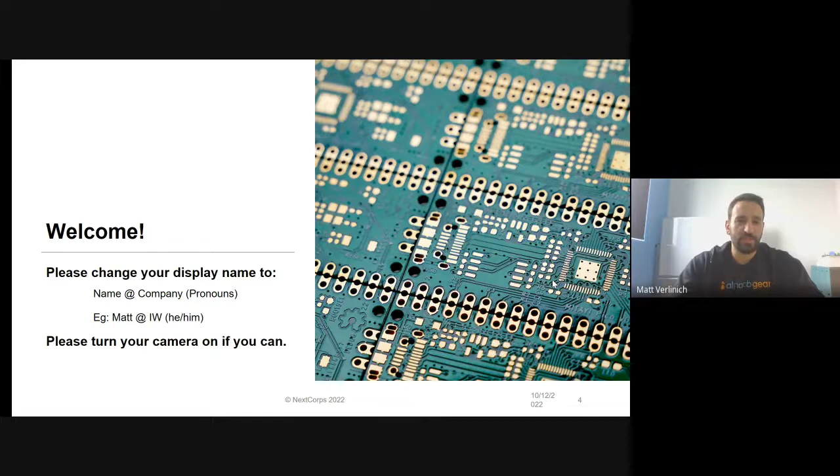Feel free to put your cameras on if you are comfortable with that. I feel like it helps engagement with other participants, but if not, no worries. I'm not sure if you can change your names in Google without changing your full settings, but give it a shot.

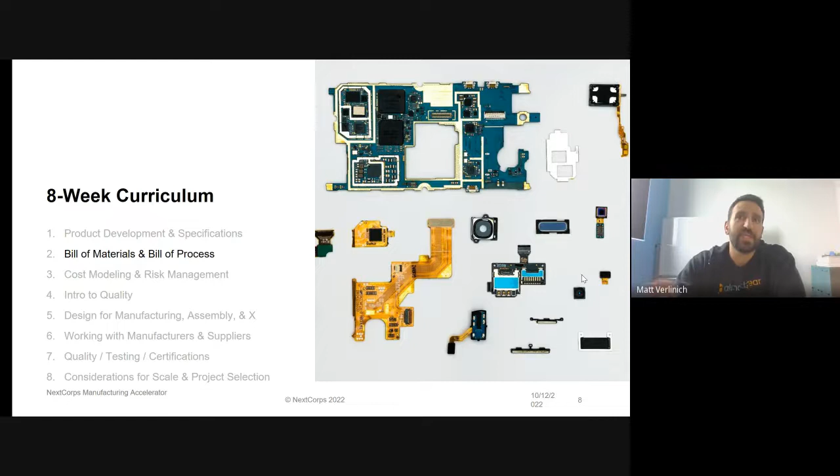Today, we're going to talk about bill of materials, bill of process. Last week, we talked about product development and specifications, and the recording of that is updated in the folder. Let me know if you don't have the link. Next week, we'll talk about cost and risk management, which is a really important topic, but also very essential to have a decent understanding of your bill of materials and bill of process in order to have a full grasp of some of those concepts.

So today we'll introduce you to the bill of materials and talk about different types of parts that are on it, as well as essential and nice to haves, and how it connects into other documents. We'll also talk about the bill of process, which in general covers, I like to think about three different types of bills of process: process flow diagram, an SOP style bill of instruction, manual bill of process, and then what I would call a costed bill of process, which is like a tabular form of how much labor is embodied in your product.

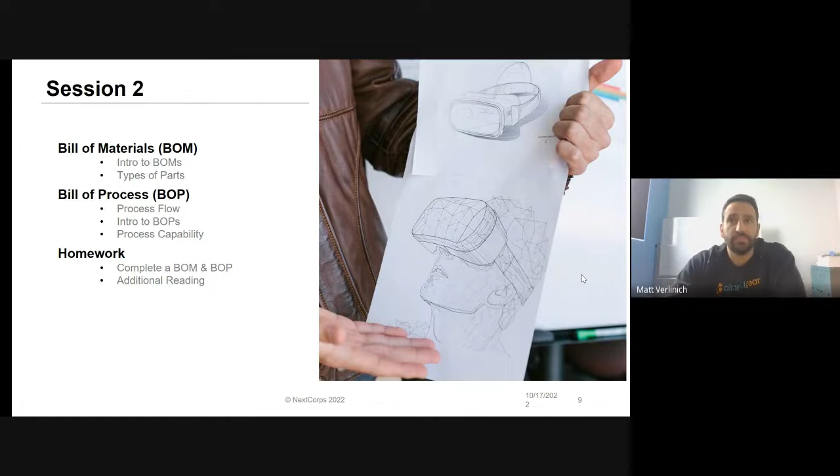Recap from last week. PRD stands for your product requirements document. Every customer requirement that you end up documenting from your customer discovery should be translated into a technical specification for your product, and therefore then documented in your PRD. These specifications can cover, but are not limited to, functionality, durability, reliability, aesthetics, certifications, and more.

The specifications portion of this should be quantitative. They should have a target value and then an assigned maximum or minimum, or both, for acceptable values. These specifications should be validated and verified through a quality test, which ideally would be its own document, which we'll talk about later, the quality test plan, and you can link specific sections of that into your PRD so that it's all tied together.

So just for the sake of the data nerd in me, if you made a stab at filling out the PRD, just drop a note in the chat. I'd love to see how many people actually took a stab at it, or maybe updated one that you already have. But I want to try to get through this so that we can actually have a good discussion at the end with some questions.

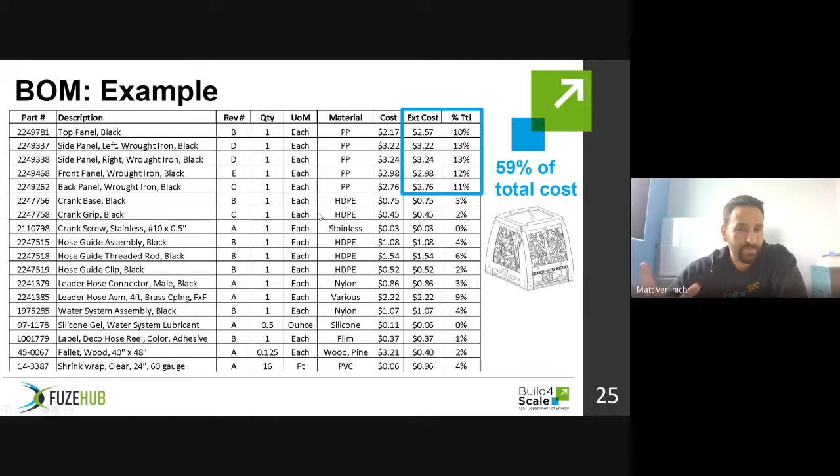So to that effect, I would highly recommend using an indented BOM format, which basically allows you to really quickly and easily identify and categorize your major systems, and then your subsystems, and then your second level subsystems of your overall product. And I'll walk through that as an example here. I don't like this as an example, but it can be useful for just seeing how somebody would fill out this particular style of BOM.

Here is a better example of the indented BOM in particular. So at a top level, we're looking at an alternator here. At the next level down, we're looking at the stator, 1.1. Now, if we're looking at 1.1.1, the stator is made up of the frame and then the windings. So the frame would be this orange part, and then the windings would be that purple part, as you can think of it.

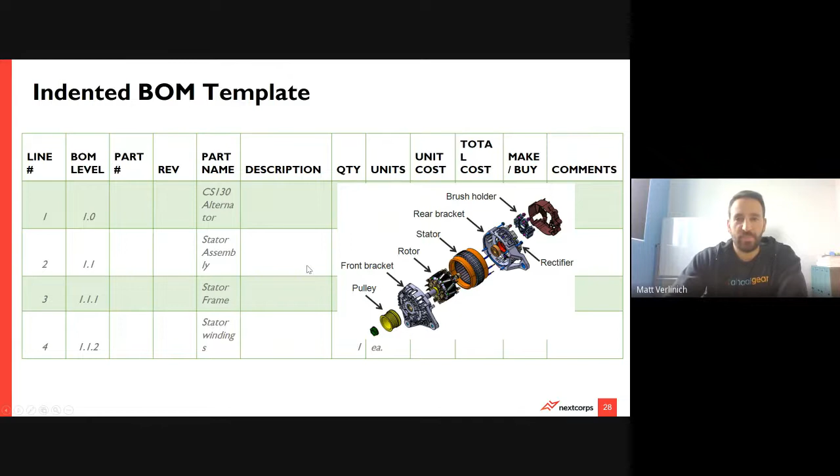So that way, if you filter based on anything that has a 1 in it, or 1 is the alternator and it's all of its components. Anything with a 1.1 is relative to the stator. But I'll walk through an example of that dynamically, which I think is a little bit more easy to understand.

There's also a useful distinction between two different types of BOMs. One is an E-BOM, an engineering bill of materials, and an M-BOM, a manufacturing bill of materials. So most people have only ever given thought to an engineering bill of materials because you're probably prototyping something that you ultimately hope somebody else will make for you, another contract manufacturer.

And the difference here between the two is that an E-BOM doesn't include a number of other potential consumables that should be embodied in the cost of your particular unit. And that could be things like plastic protectors used in transport from one assembly line to another, or from your manufacturing facility to a packaging facility, packaging materials, different types of boxes, all sorts of random things like that.

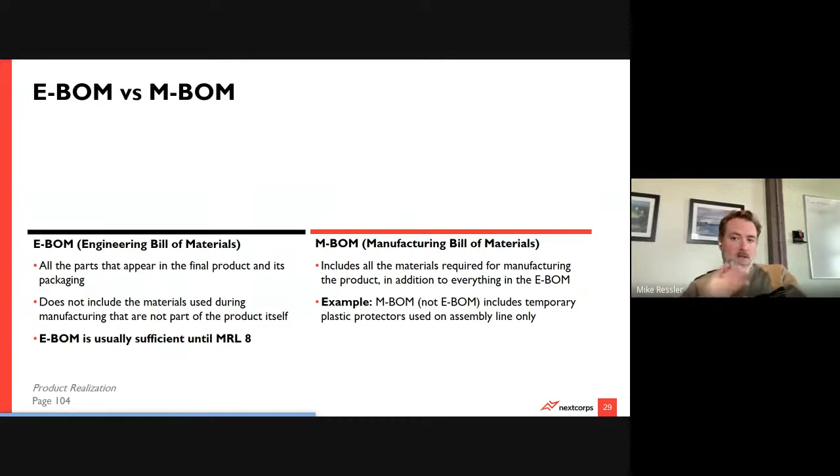What's up, Mike? So you said it would include the cost of the things we would need to ship between assembly lines, which I get. Would you model shipping into something like this itself? So like, per unit, it would be about this much, the actual shipping cost, or would you hold on to that separately somewhere else? That is a really good question.

And I would say that depends on what you intend to use your bill of materials for and what stage your company's development is at. If you're looking to get a really good idea of what your actual unit economics are, then I would include it, especially if you are responsible for it.

For instance, if you are having cases injection molded at one place, but your electronics PCB manufacturer is assembling them, then you would probably want to figure out and document how the cases get from here to there and how much that costs, especially when you have different potential configurations coming from different suppliers. And if you're using, we're going to talk about this in a minute, a flat BOM structure, this is where it gets really complicated because it's only two-dimensional. So you can't do multiple different analyses very effectively.

So all of the potential permutations of cost that come from using this supplier over that supplier, and shipping from here versus shipping from China. I would create separate individual BOMs for each one of those cases and manage that in a specific folder for that task of doing the analysis.

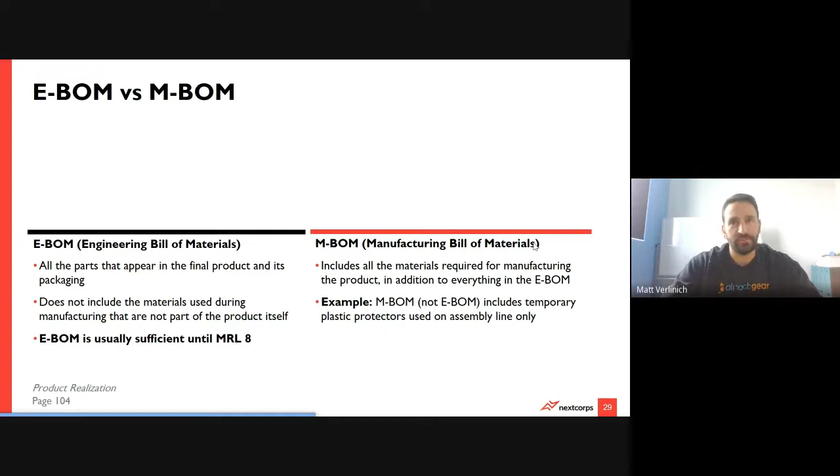And if you make a design assumption early on, and then you find out later that it's a real burden to actually manufacture that and set up a manufacturing line, it could have been helpful to start the MBOM earlier, or look at it that way. So here's an example template of the indented BOM. Again, we'll go through an example, which will be better.

Now, another really critical task, which I think is oftentimes overlooked, same thing with the PRD, the product requirements document, we mentioned this: change management and version control. The earlier you are, the more stuff is changing and more rapidly. And so I wouldn't necessarily recommend instituting a really rigorous change control process, because you want to make those iterations quickly and not hold yourself up.

But as you start to get higher in the MRL level, as you get closer to actual production delivery, you really want to be disciplined about documenting every single change that is made to your bill of materials on a cover sheet so that you can quickly and easily assess the difference between one and another.

Especially if you're using Excel sheets and like a flat BOM structure, it's really easy to bury assumptions in the calculations in an individual cell that maybe are no longer valid. This is a great example: if you're cutting parts out of a sheet and you switch from one sheet size to another, your cost could easily drop by half. But if you forget that that assumption was made and you change it, suddenly you'll wonder why your cost dropped so much, and is it an error, or did you break a formula?

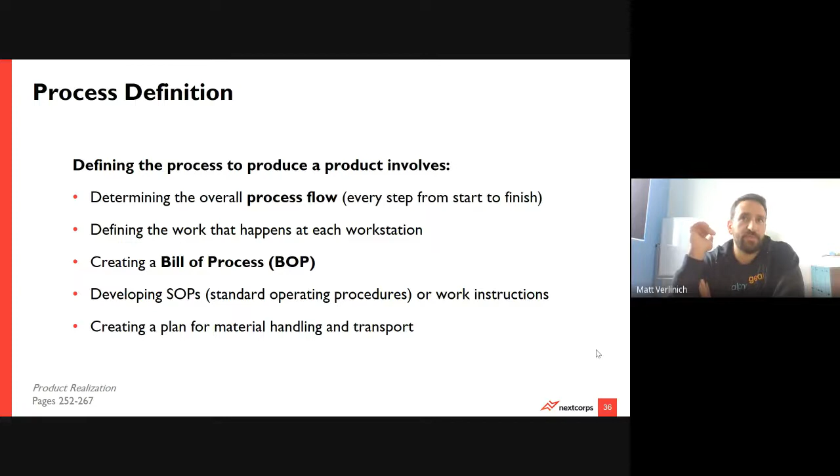Now, that may or may not be a valid assumption, depending on what your product is, how complex it is, whether it has electrical, mechanical parts, what your specifications are. It's very complicated. And so I wouldn't recommend digging in and trying to complete a full bill of process, because it's something that takes a considerable amount of work and will change dramatically depending on your design decisions as you continue to iterate. So that's why I would say it's a good idea to start with a process flow diagram, which is a sort of overview, simplistic view of it, and then work your way into creating a more sophisticated full bill of process, as well as SOPs.

So here's an example of a pretty generic, easy to understand process flow diagram for making banana bread. So we would start up here by assembling these ingredients. You move them to an assembly station. There are some sub steps ahead first, which is, mash the butter and the bananas together. That combination goes to the assembly station to start with. Same thing with the eggs. You got to beat them, make the batter, move it to a pan, bake it, and then you end up with banana bread.

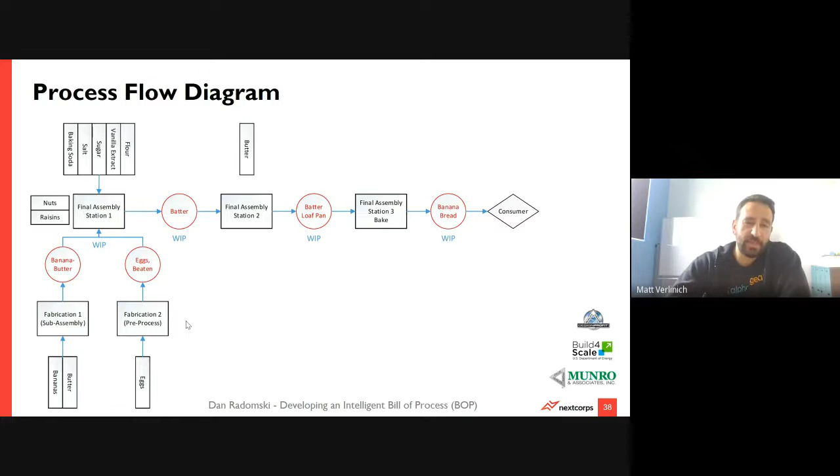So that level of process flow diagram allows you to identify things that can be done in parallel, what work in progress stages there are and how long that takes. So is there anything that can be done to streamline this process? Where do you want to put quality control checks in? Things like that. Useful for your general design decisions.

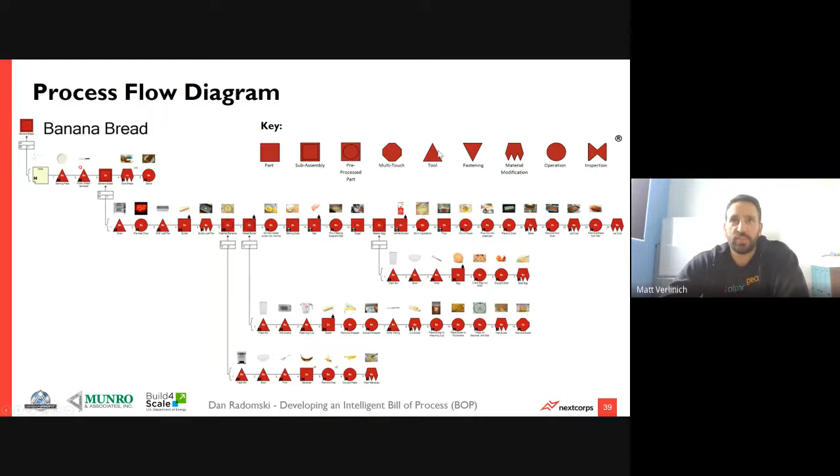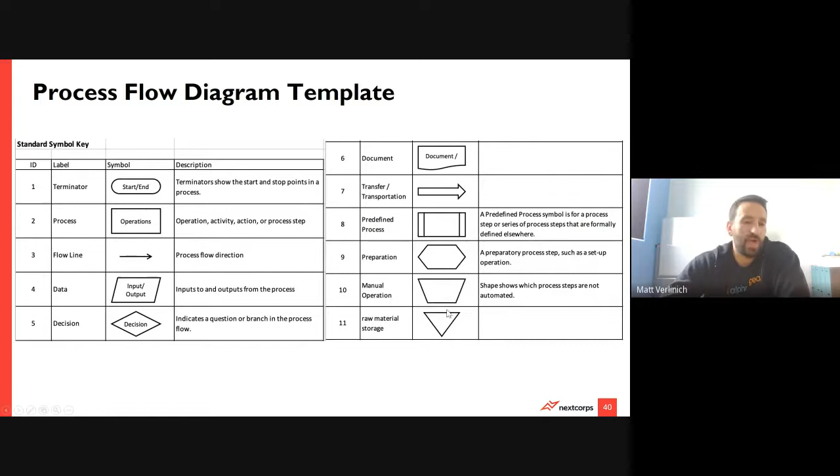Here's a bit of a more complicated bill of process, also for making banana bread. That came from the Build4Scale curriculum. So you can see here, there are different icons that mean different things. Tooling, a part, sub-assembly, pre-processed part, and multi-touch inspection steps, things like that, which in creating your own process flow diagram, I would choose something that makes sense for you. But we also have provided in the process flow diagram template some basic operations and diagrams that you might want to consider using.

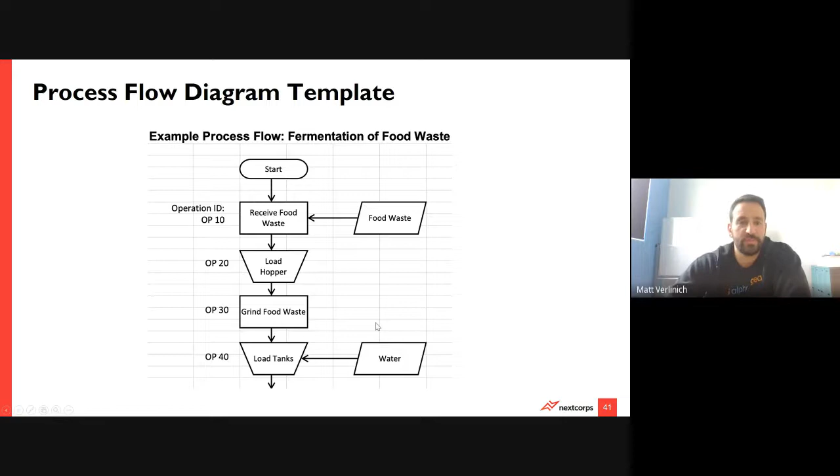Another example of that, the one document has it in an Excel sheet. I also created a Google Drawing template, which I think is a little bit easier to use because you can more dynamically rearrange stuff and it's less resource intensive on your computer. But we'll go over that in the example.

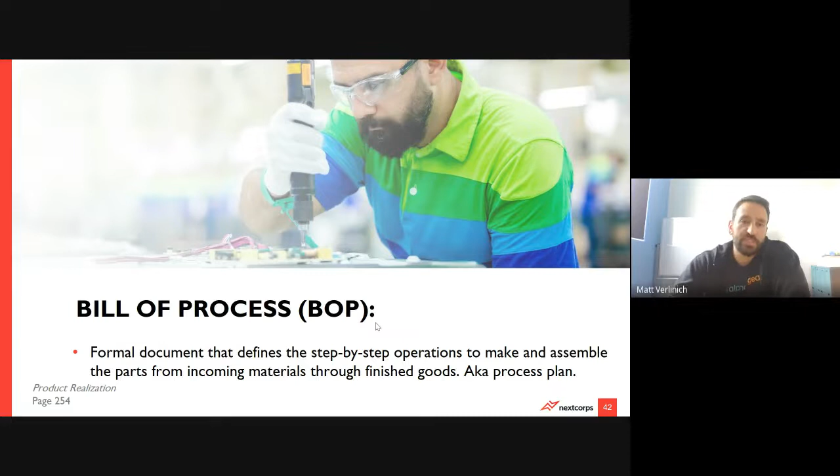So the official definition of a bill of process is that it's a formal document that defines the step-by-step operations to make and assemble the parts, everywhere from incoming materials all the way through finished goods. So also known as your overall process plan.

So this is a document that you would put into place so that you could have that available for hiring new employees or swapping out employees as there's changeover, or in the case of using a contract manufacturer, it's something that they would either want you to already have, or more oftentimes they want to develop it for their own systems, given their understanding of how many different employees they have with different skill sets and how many different assembly lines they have that can operate in parallel. But it's a good idea to have a good place to start.

This is a more tabular view of it, which I would call a costed BOP or a costed bill of process. And even this isn't a great example of it because it doesn't have all of the times on here. But the objective of this is the same way that you would use your bill of materials to identify and optimize your part costs and your manufacturing methods, so your design for manufacture, you would use a bill of process like this to optimize for assembly. So design for assembly, or some aspects of design for manufacturability as well, which we'll talk about in, I think, the 5th session of this curriculum in greater detail.

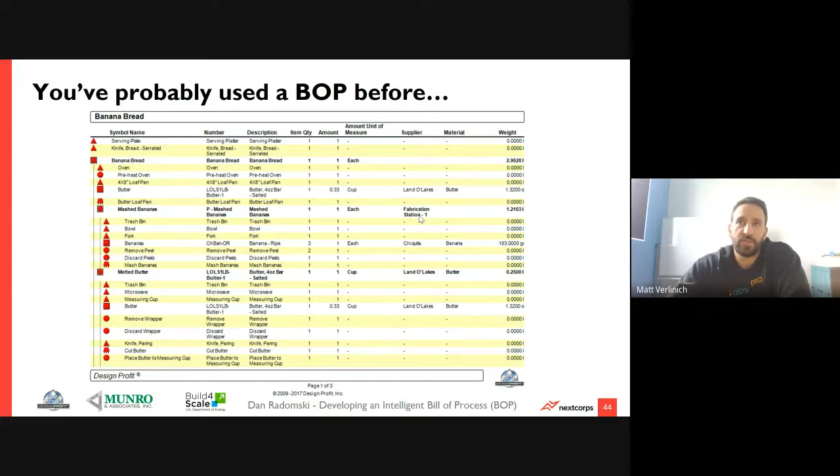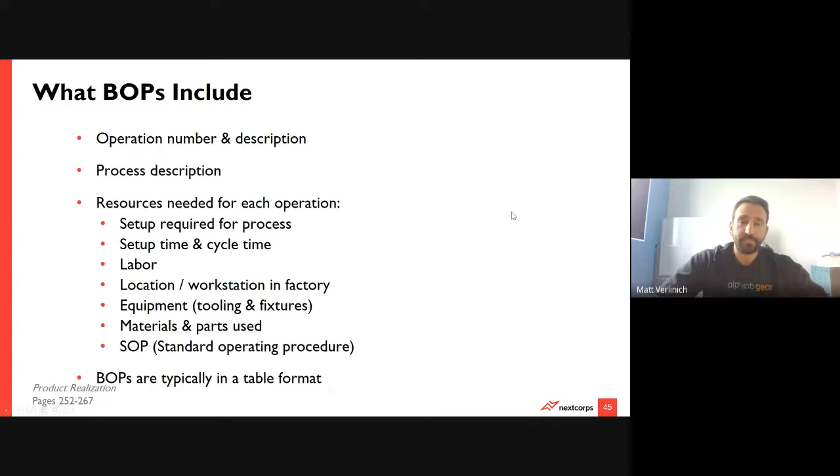So here's an example of a bill of process, which has step numbers, the operation, where it is, what's happening. This SOP, in the old days, when everything was actually on paper, you would have to very intelligently name your document titles. And this would correspond to an organization system in a filing cabinet as to where you could find each document in that process. Now you can just create a Google Doc and link it to that, but it still behooves you to have an actual rhyme and reason to how you name these documents so that they can easily be clustered and sorted together.

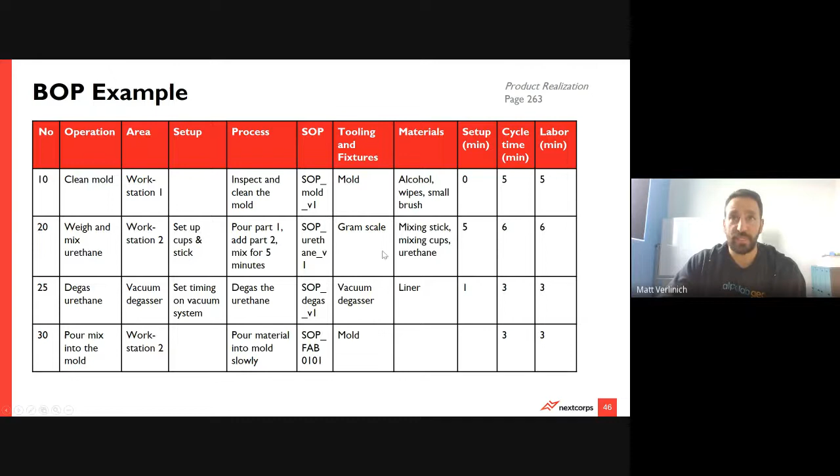I like this one because the units are standardized all down to minutes. So that way you can total these up more easily to figure out what clusters of sub-steps cost in terms of time. And then you could also add what your hourly rate is for that particular group of sub-steps to get a dollar cost to it.

That's another question that oftentimes comes up too: it's easier to batch out a bill of materials down into one unit. But oftentimes when you're actually manufacturing, you're going to have to make assumptions on batch size, because you can't just make one of something if you're going to be cutting out a whole bunch of parts off of a sheet. It's not always going to make sense for you to have those all inventoried in-house, so you can just say, okay, grab 5 of those parts for this one assembly.

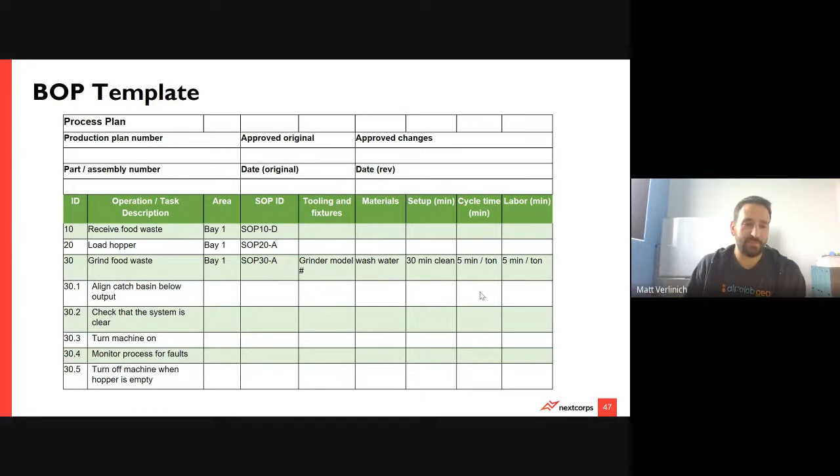There might be dependencies and assumptions that you're going to have to make in terms of how frequently can we do this and how long will it take to process it? How many units will that produce in that time frame? So even at the end of it, you then have to normalize it for batch cost down to your unit cost in terms of labor.

Again, if you think that you're going to just not have to worry about this because you're relying on a contract manufacturer, technically true, but that doesn't mean that it's not going to come back to bite you in the ass. It's also why it can sometimes be a significant burden to get a quote on a product from a manufacturer, especially for what's called a box build in the electronics world, because they're not going to want to just throw a random price to you without having a good understanding of how complicated it is to successfully assemble that product.

So if you don't have any of this stuff documented, you're asking them to do it and they're going to bake it into the cost that they provide to you. It's just something to consider when reaching out to suppliers and negotiating. Sometimes they'll bill it out as a separate NRE cost for the development of that, or you could pay a specific product design company to just do that portion of the documentation for you.

But I find that it's oftentimes easier. Most of the time, your product isn't that complicated, and manufacturing can get a pretty good idea, at least enough to give you a reasonable quote, especially if you're not particularly price sensitive. If you have good margins, you can just send them a video of you assembling the product, and that can oftentimes be a way easier cut to the chase to get to at least a rough quote. But these are nuances, all dependent on what your product looks like and how complicated it is.

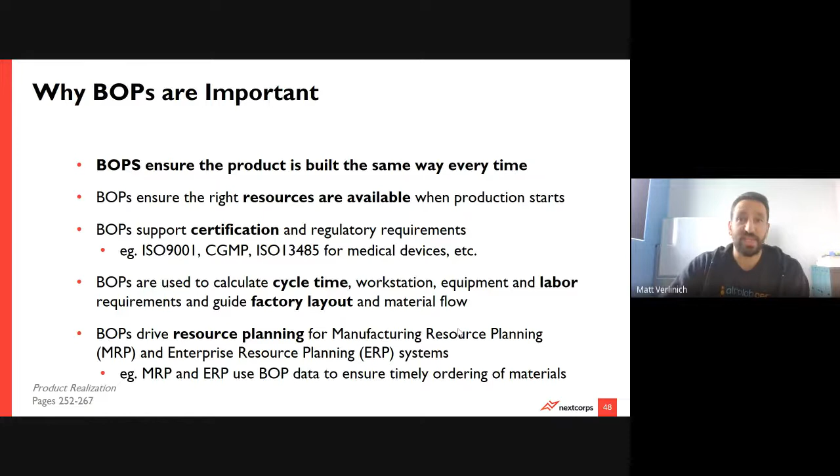So best practices, your build process should include the same list of materials that's on your BOM, ideally all tagged with part numbers. The build process is designed in parallel with the product itself. So it is going to be a living document, and the amount of effort that you're going to want to put into that depends on your stage.

It's critical for identifying DFA opportunities, design for assembly opportunities, as well as your material handling requirements and variability in your process and assembly time. This is something that the U.S. Postal Service and UPS and FedEx are finding out with this time of year. Every year, there's a bigger and bigger surge in deliveries.

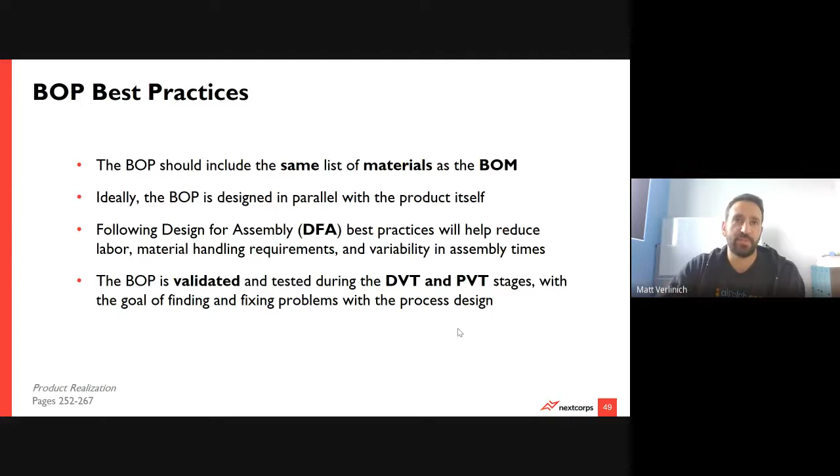And so how do they manage a surge workforce that they have to train up in sorting and organizing and shipping and delivering packages to people, whenever it's 4 times the rate at any other time of the year? That can also potentially be a reality of your business, depending on what your product is. Now, the build process is validated and tested primarily in the DVT and PVT stages of prototyping. So that stands for design validation testing and production validation testing.

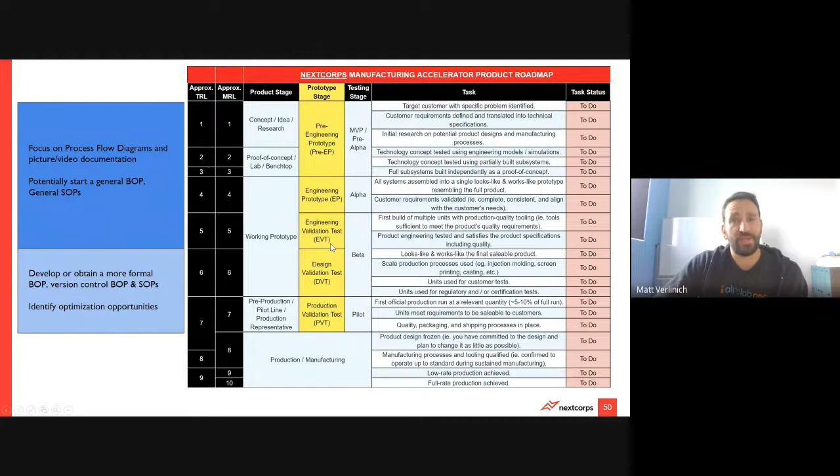So back to the initial assessment overview, basically, if you are at MRL 1 through 5, meaning you have a pre-engineering prototype, an engineering prototype, or an engineering validation testing prototype, or if you're in the pre-alpha, alpha, or somewhere in the beta testing phase of your product, you're probably going to want to focus more on a process flow diagram, picture and video documentation, not super wordsmithing every single part, not really doing time studies of how long it takes you to produce everything.

I would still recommend filling out a rough template to give yourself a general idea, because at this stage, you're probably also trying to identify what your unit economics are and whether it's feasible or not. This is one reason why consumer products are so difficult, and why a lot of the manufacturing and businesses in the US end up in the medical and defense sectors, because those are industries that have much higher margins. So you don't have to do all of this stuff at the early stages. You can just make some conservative assumptions and move on.

However, if you are now at MRL 6, 7, 8 stage, where you have a design validation test prototype, this is definitely a looks-like works-like prototype combined, because you're going to be doing beta testing with actual users, ideally without shepherding them through the experience, to get real world feedback in a customer relevant environment.

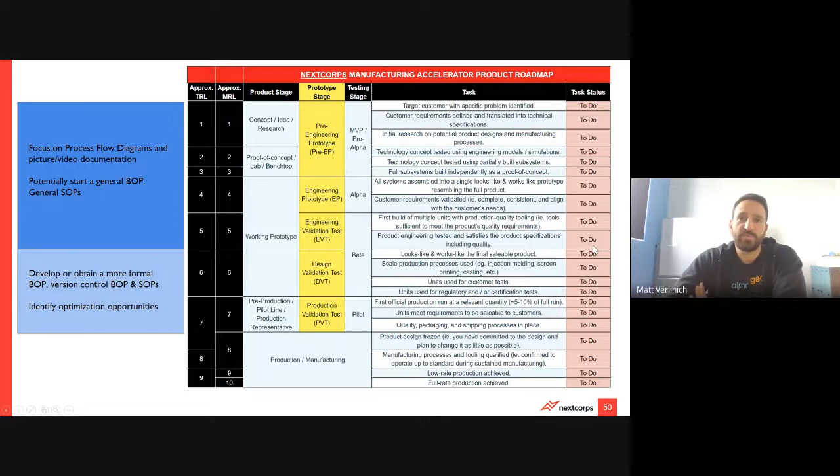So things to keep in mind as a last summary of the bill of process: what materials you're using, what equipment is necessary to assemble it, what is the labor requirement for each one of those steps, and how can you use the bill of process to get an estimate of the cost of each step of the assembly and also each part or component in your BOM. What is the most expensive assembly step in your process? That is expensive from a time perspective as well as an actual cost perspective.

Because if you can use cheap labor to do something, but it takes a lot of time to do it, it might not result in a high tangible cost, but it can limit your production rate if you suddenly get an order for 10,000 units, because then you're going to be limited in who you can use as a supplier. And so understanding it from both a time perspective and a cost perspective can identify opportunities for DFA, design for assembly optimizations. Also ask yourself, what is the priority right now for your business? Is it driving down cost? Is it improving production rate?

Do you already know that your unit economics are feasible, as we sort of talked about earlier, as to what your margins are? What's up, Mike? And then just to clarify, we're working with a contract manufacturer. You had mentioned something around that. The recommendation is to get a bill of process from the contract manufacturer to sort of probe at how they're putting it together. I know we've put forward a here's how you should build it, and we've done that collaboratively. But is this something I should be requesting from a contract manufacturer?

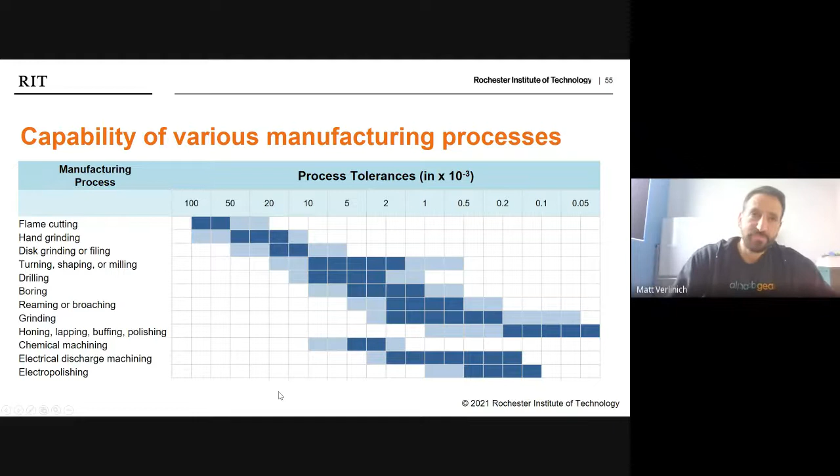Right. So homework for this session is take a stab at filling out a bill of materials. If you already have one, consider some of the things that we talked about and ask yourself if your bill of process has all of those. Same thing applies for the bill of materials, bill of process. I just totally switched those in and out. The product realization textbook has great chapters on this, chapter 6 and 11, if you'd like some additional reading. And then the overview that I have also has links to the Build4Scale curriculum.

So does anybody have any questions before I start walking through the example templates? But this is that curriculum outline that I said I dropped into the overall Google folder for the program down here. It has links to each week's presentations, what the big topics were that were covered, what we'd recommend you check out as homework, reading assignments in the product realization textbook, and then links to the templates.

I got to make sure that these links are actually all updated, and same thing with the Build for Scale links. But there's also a detailed outline which has even more specific breakdowns of what the slide level topics were in these presentations. And this is a working document, so I'm updating that for the latest revisions as we go through it. But if no one has any questions right now, I can start going through, and feel free to shout out, raise your hand if anything comes up as we go through it.

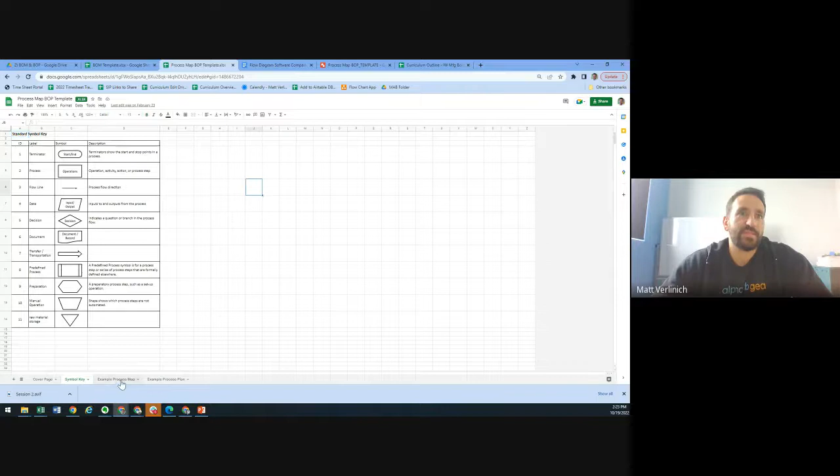Let's go over the process flow diagram. This is the process flow style BOP, which is created also by RIT, and has these symbols which you can sort of just copy paste and create your own example in Excel, but my computer is already having trouble with that. Here's an example of one that's filled out. So I would recommend, if you use G Suite, the Google Drawing template instead, because this one can be a bit easier.

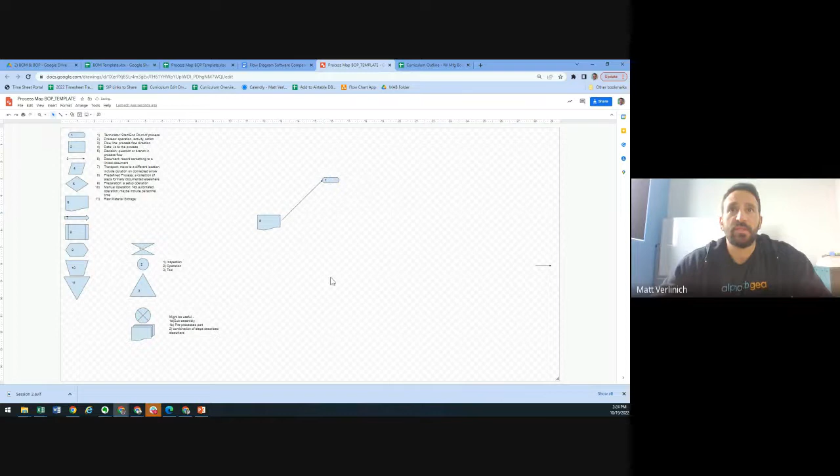Copy this, copy this, and actually link it. Didn't work. So it does that sort of dynamic linking and stuff like that, which makes it a bit easier than doing it in Excel.

If neither of those options work for you, one of my former collaborators at Rochester at NextCorps created this nice software diagram. So there's a whole bunch of different software templates out there that you can use to do this type of process flow diagram stuff.

But the last thing I will talk about is here is one of the examples of the process plan, or a sort of tabular BOP that you could use to ultimately tabulate your labor costs. I didn't fill out this example yet, but I plan to in the near future, because I think it would be useful to get a better understanding of how you can estimate costs.

So I think that about covers everything that I had for today. I didn't leave a lot of time for questions here, but does anybody have anything they'd like to discuss or ask about?

I have a question. What are the things you missed in bill of materials and bill of process that have bit you the most in the past? That's a good question. I think my product is deceptively simple, and that bit me more on the bill of materials side because I didn't have all of the specifications listed for what I needed that material to be. And then I didn't have a version control system.